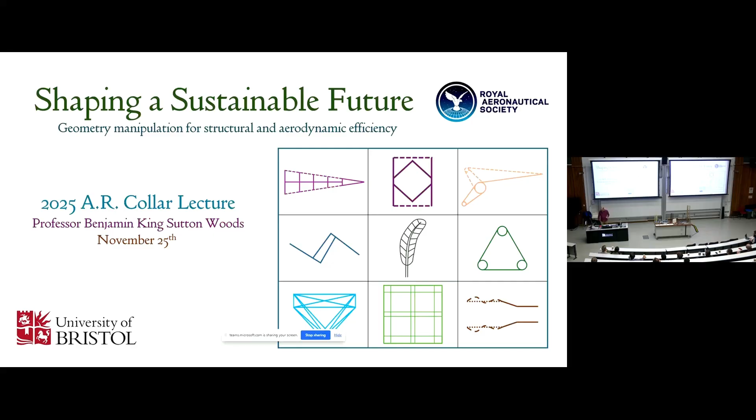So with that cheery start, I wanted to give you a little bit of a prelude, a little bit of an incredibly self-indulgent trip through my sort of history as a human being, as it were. And for me, that starts in the woods. So Woods is my last name, but it's also very much a huge part of who I was growing up.

So I grew up in a very rural part of the state of Maryland on the east coast of the USA, right next to Washington, D.C. And my mom was a single mother. She worked in Washington, D.C., so I had a lot of afternoons home from school running around in the woods in our house. And it was really sort of where I felt comfortable and happy and where I felt who I was. But there was a little bit of a transition, let's say.

So as I approached my teenage years, I got sort of distracted and drawn in to the shiny, sexy world of aerospace engineering and airplanes. Believe it or not, this incredibly suave man standing in front of you tonight was actually a slightly nerdy teenager. So I spent a lot of time obsessing over details of shiny World War II aircraft. The Mustang, of course, because I'm American, although I think today I would put a picture of the Spitfire instead.

Anyway, the point of this is that as I sort of embraced that part of who I was and what I liked, I really got into this idea of technology as this incredible, beautiful thing that can make real change in the world, and that maybe we can make new things that no one's ever done, and that was really exciting. And for me, it was exciting because it was shiny, right? Because it was something different and new.

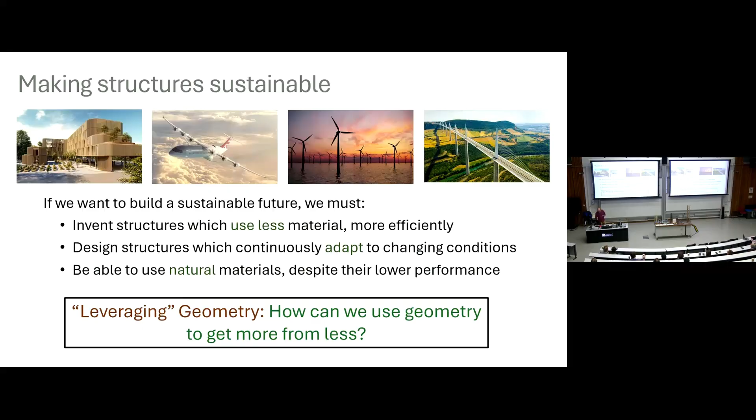Well, that sounds great, but the very simple reality is that in general, natural materials are substantially worse. They have significantly lower performance. And so the argument again is, what can we do with geometry to make up for that? How can we use geometry to offset those material deficits? So these are the overall topics or framing I want to talk through tonight.

And just to give you a little bit of heads up what's coming. This is the entire talk tonight. There's 9 different research topics, concepts, ideas, whatever you want to call them, that I'll go through. I have to apologize. There's kind of a lot here, so I will be doing more of a supersonic flying over of these topics than any sort of in-depth discussion. I'll show lots of pretty pictures, say a few things. Really, it's just to show the breadth of ideas. Everything here is published and you can look at it in more detail through papers, et cetera.

Roughly speaking, though, the overall talk splits into 2 different categories. So in the first instance, I'm going to talk through my work on morphing aircraft. So that, as I alluded to a few minutes ago, is aircraft that can change their geometry in real time to optimize their performance, reduce fuel burn, et cetera.

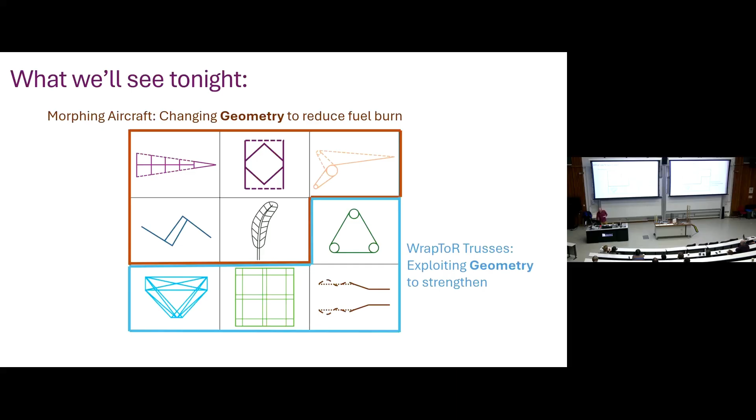The second half of the talk, roughly, we'll be talking about WrapToR trusses. WrapToR trusses are a manufacturing technology that I came up with quite some years ago to allow us to build truss structures that are structurally efficient while still being really quick and cheap to make. So that's what's coming. I do have to start, again, with a little bit of a disclosure.

So as an academic, as a professor, you may not be too surprised to learn that I don't actually do that much real work in my job. I don't actually get to do so much of the research anymore. So it's incredibly important that I lay on the table that everything that you see here, well, not everything, but a lot of it was done by other people, specifically PhD students, master's students, and research associates that I've had over the years. I've been incredibly lucky in who's come along and trusted their years of their life to me.

I just want to reiterate again that what you see here is really more my ideas maybe, and then all their hard work. So with all of that multi-stage initialization of this talk done, let's go through. Let's start talking about some technology, some actual ideas. Let's look at some pretty pictures and have some idea of hopefully what I've been working on all these years.

So I think it's quite fitting that I start by telling you about the fishbone active camber concept. So when I first came to the UK in 2012, I came to work for a professor at Swansea University, Professor Mike Friswell. He was actually also one of those Sir George White chairs here at Bristol before Jonathan. But he was incredibly kind to me. He basically gave me free rein on what I researched. And I had this sort of thing in my back pocket that I'd been thinking about during my PhD, but never got a chance to play with. And so I just went with that. And that was this concept.

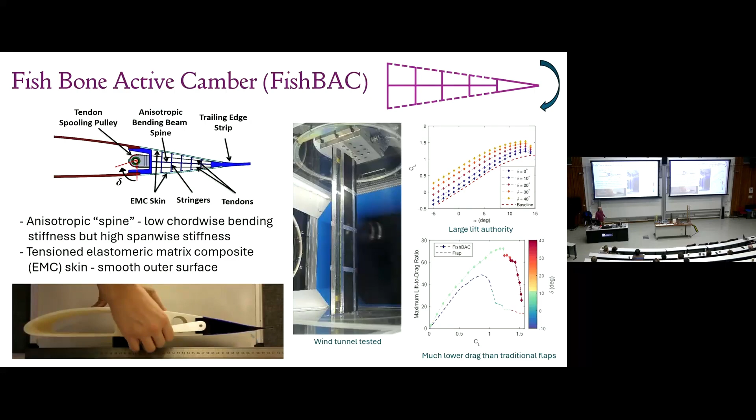So based on that really promising initial performance of the FishBAC, we've actually done quite a bit of different types of activity with it, a lot of different research. It's fundamentally quite a complex problem because we are doing this in a compliant way. We have flexibility, so we can't just assume that when the shape changes, we know what'll happen. The actual shape that's created in any particular situation is a really complex balance between the structure, the actuation, and all of the aerodynamic forces and pressures acting on it.

So we have to use somewhat sophisticated analysis methods like fluid structure interaction in order to actually be able to predict what's happening. So there's a little bit of another side of the sword when we get into this field, because it does require a reasonable level of sophistication in how we look at things. Having said that, we've developed a lot of tools and analysis methods. We've looked at the actuation side of things.

We've got a tendon-driven actuation system, which is explicitly inspired by how our own bodies work when we move our muscles and antagonistic joints around our skeleton. It's a similar concept, so there's a lot to do with developing that tendon system, looking at the actuation side of it. We've done a lot of work on the aerodynamics as well, of course, from low fidelity to medium fidelity to high fidelity methods.

Another fun little thing along the way is this other related concept called MELD, which is a morphing elastically lofted transition. It's sort of a three-dimensional version of a FishBAC that allows you to have a variation in that camber along the span. There's some really fun geometry inside of that. I don't really have time to dig into it, but that's worth a Google on ResearchGate if you're interested.

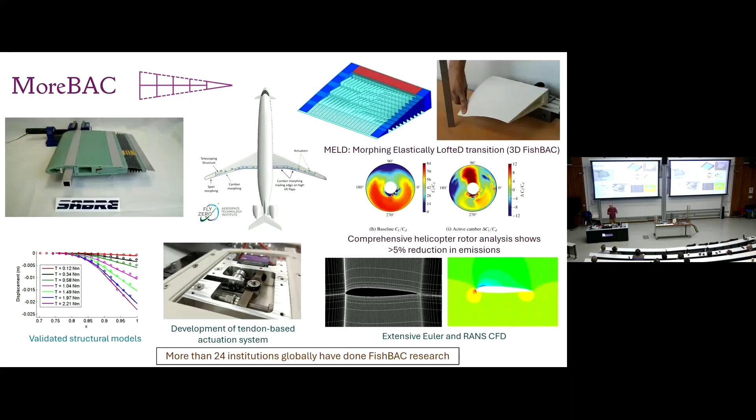Now, I will say, genuinely, as nothing more than a brag, that I recently had to put together a case for promotion to professor, which happily went through. But as part of that, I had to sell what I've done. And so I started Googling around, and it turns out that this concept has been looked at by 24 other institutions all over the world. And even happier still, the first person to show up tonight came from Southampton, and he said he came because he is working on the FishBAC at Southampton as well. So that means 25 institutions, so keep them coming. Anyway, let's keep moving.

Another related concept. So FishBAC is about changing camber. That's a really effective way to control the amount of lift that an airfoil generates. But there's a lot of other ways that we might want to change the shape of the wing that aren't quite so simple. One of the fundamental issues is that if we ever want to change the area of a wing, then we're going to need a material that can smoothly and flexibly change its shape. Now, this is really the ultimate core issue that's plagued all of morphing aircraft research from the very beginning. And I'm not claiming that I've solved it, but here at Bristol we've developed an alternative geometry that allows us to tackle this problem with morphing skins in a slightly different way.

And I think the key thing to get across here is, if you imagine the top of a wing, and let's say for the sake of argument that you wanted that wing to get longer and shorter in order to change its span and its flight performance, you would need a structure that, under those very high levels of aerodynamic load you would have flying at, whatever, Mach 0.8, can get longer and shorter without bending out of plane. You need to really control that out of plane displacement. You need high stiffness out of plane, but low stiffness in plane. And that's an anisotropy problem. You need a material or a structure that has very different stiffnesses in different directions. And that's what this is.

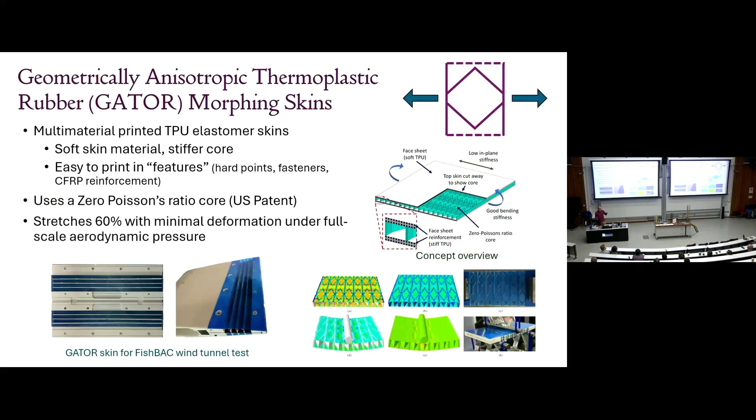So this concept is working out pretty well. I've had a PhD student finish up on it. We've done some nice demonstrators. So there's an example here of a wind tunnel model of the FishBAC that uses this concept. And we're now looking at it on a bigger scale. But basically, the trick here, again, is to use geometry plus these flexible materials to give us a better balance of what we're trying to achieve.

Now, this is our current work with the Gator skin. So there's a large ongoing project here at Bristol called DAWS2. I've got a tiny little bit of it where we're looking at using those Gator panels, that flexible skin panel, to solve a problem that's come out of a really interesting and really prescient concept that Airbus is now looking at. And that concept is called the semi-aeroelastic hinge. So some of you may know that already.

It's been a very active bit of research, both here at Bristol, where before my time it actually originated, and it's since gone to Airbus and it's being looked at very seriously there, including plans to actually flight test it in the next year or so. But the semi-aeroelastic hinge has a little bit of a problem because the basic concept is that you take the very tip of the wing and you allow it to rotate. You allow it to bend out of the way of any oncoming gusts that would otherwise potentially break that wing.

So there's some really clever geometry tricks going on with that concept itself already. But one issue that's created by it is that there's a gap. There's a hinge mechanism that you're putting outboard, and you can see here in this flying small scale model, and in the larger renderings, that this hinge needs to be covered up so it doesn't add too much drag, but unfortunately, it's actually angled to the airflow. There's a geometry trick going on with the basic concept that requires that hinge line to be angled.

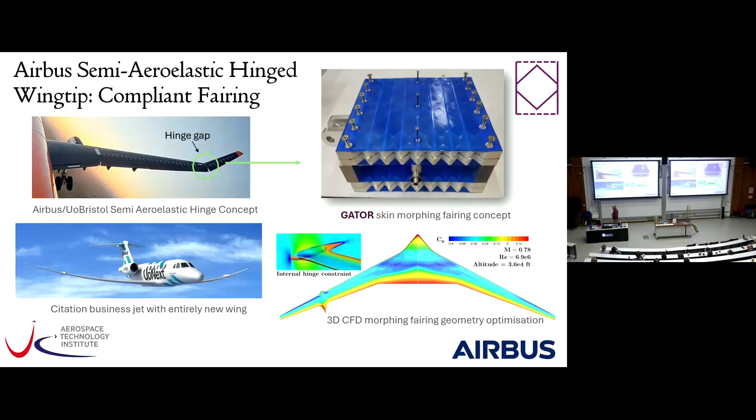The result of which is that any normal mechanical fairing that you might put over it ends up actually quite draggy because it's misaligned with the flow. So the basic idea of our work on that project is to use these compliance-based mechanisms, this gator concept, to cover that hinge with a structure that can smoothly deform while taking that load. And you can see some initial prototypes here, and there's 2 RAs working on that now, with another related piece of work looking at the aerodynamic optimization of the shape of the fairing in order to minimize its drag. So we've got some really fun CFD optimization work going on with that.

So staying on the semi-aeroelastic hinge, but moving in a slightly different direction. A concept that I've been playing with for a few years. I don't have a good name for it yet, apologies, so we'll just call it a 2-stage torsional stiffness for now.

I'll come up with an acronym at some point, because you don't just have the acronym, of course, you have to make up a name that gives you a good acronym. It's a very delicate science. It's a black art. I spent a lot of time thinking about it and worrying about it.

But anyway, back to that semi-aeroelastic hinge concept. One of the other realities of how that concept works is that in normal everyday operation, when you're just cruising around, you would love for that wingtip to be level. You would almost love for that device to not even be there. You just want it to look like a normal airplane wing. Up until the point where a gust hits it, and you need that device to move out of the way to reduce the load generated to make sure you don't have any issues with failure of the wing.

Now, the current approach to doing that is rather active and mechanical. So, they're looking at various devices that can keep that wing locked in place, and then they detect a gust and they release it as an active process. The concept that I'm looking at is a way to replace that active device with something that's purely passive.

So literally springs and levers and maybe a bit of cable. Where the fundamental idea, in the simplest possible way, is that if you could make a spring, a torsional spring, that's really stiff in its initial working range, then that would be really good at keeping that wing as level as possible in normal flight.

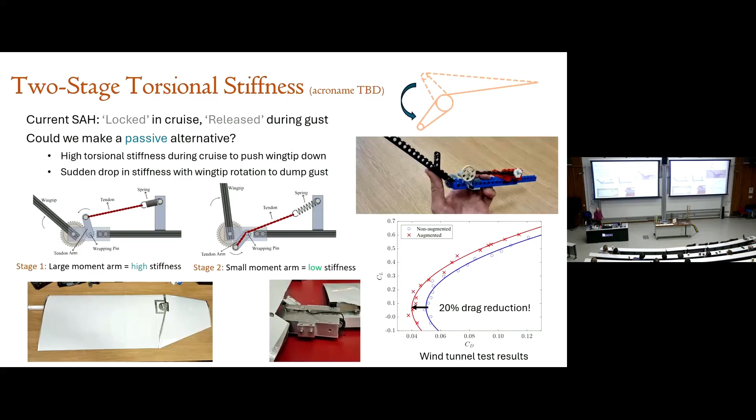Okay, so now we transition to where I'm at with my fellowship right now. So for the last 5 years, I've been on an EPSRC Early Career Fellowship called AdAPTS. That's another over-engineered acronym for Adaptive Aerostructures for Power and Transportation Sustainability. I even made a logo for this that no one's ever looked at.

But without belaboring the point, back to my earlier story, there's a little bit of, not quite a crisis in confidence, but starting to question things. So the work I've been doing for a very long time on morphing adaptive structures, unfortunately, is still actually really far away from reality, right? For lots of reasons, one of which is just the incredible and well-deserved conservatism of commercial aircraft.

You can't just throw stuff up there, especially if you're talking about wacky stuff that's flexible, that has elastomer-based skins, et cetera. And so unfortunately for me, it feels like real impact is quite far away still. And as a result, I've tried to find a version of this problem that I think maybe has more potential impact, that has more fundamental depth to it, or maybe just that is interesting and different, I don't know.

And the version of that I found is something that I call biologically inspired robotic birds, so BIRB. And the idea here is, okay, the simple version of the idea is let's just make some drones that look cool and look like birds. The overly philosophized version is how do we figure out how to get better at designing complex systems that have a lot of different things going on at the same time, right, like a bird, where they have control and sensing and actuation, aerodynamics, and structures and propulsion that happen in an unbelievably cohesive way, right? It's sort of everything going on all at once in a way that is just so fundamentally different from how we build our airplanes today.

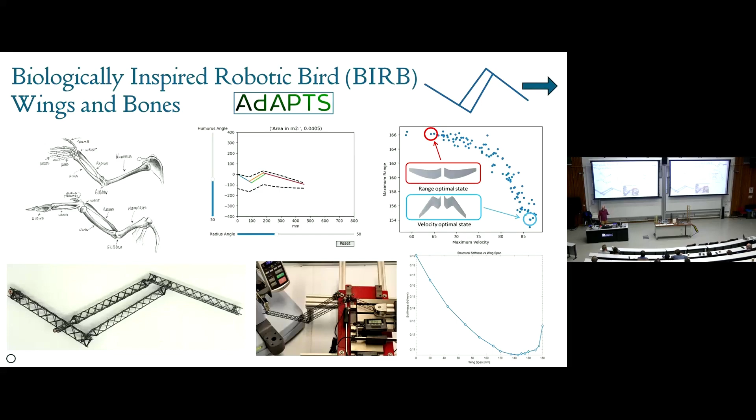We're now starting to look at, with the same researcher, what happens with torsional stiffness in the same way. When we try to twist the wing, how does that change with span? I expect we'll get a similar, interesting, complex result. And so that is just an initial thumbnail sketch of what, to me, can grow out to be really quite a nice, interesting, complex consideration of the sort of kinematic coupling that's happening all the time in bird wings. And I think there's something quite interesting there to dig into.

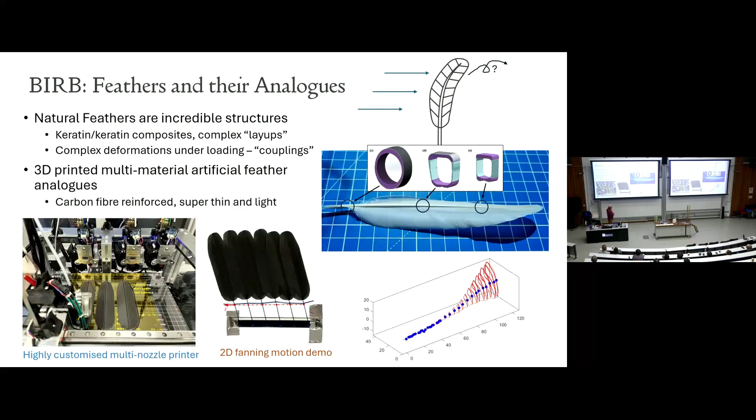And again, this is all very early work, but watch this space, I guess, is mostly what I can say. Okay, now I'll speed up a little bit because I do have a tendency to keep yapping on.

And we'll switch gears. So now we're going to talk about the wrapped tow reinforced truss technology, WrapToR Truss. I invented this in 2009, believe it or not. Never felt more old. I was on a project at the University of Maryland to build a human-powered helicopter. It was a complete waste of time. We spent like 5 years, hundreds of thousands of dollars, like 50 people working on it. And we made a human-powered helicopter completely useless.

It was the size of a US basketball stadium. It could sort of fly up and then come back down. Completely useless as a piece of technology, but an incredibly difficult engineering problem that ended up being a really nice sort of motivation or just opportunity really to develop a new piece of technology.

So at the very start of my involvement on the project, I was given the job of blade design, so I was in charge of the aerodynamic and structural design of the blades. I spent a lot of time looking around at structures and materials to make the spar, kept running into sort of excessive weight and issues with that, so I came up with a truss as an incredibly efficient geometry solution, again, back to geometry, made from composite materials, which of course are the best materials that we know how to make at this point in time.

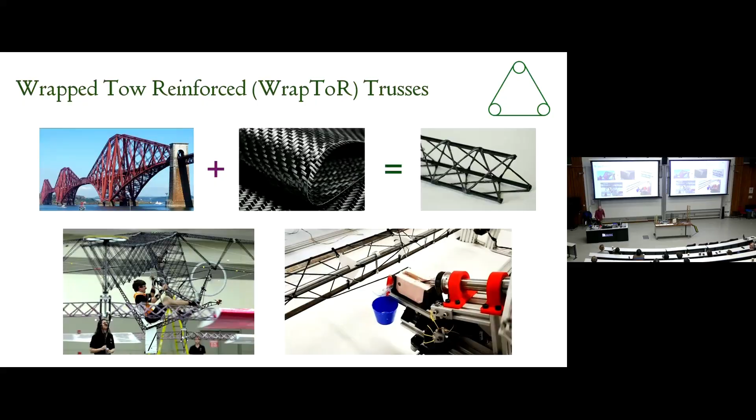But basically, the point is that you end up with, I would argue, especially in all the proposals I write, the best of everything. So you have the best geometry that we've come up with as engineers for efficiency. You have the best materials, and we're doing it in a way that's sort of low cost and scalable. Now, that's the basic idea. There's been quite a few students and quite a bit of research over the years, so I'll just briefly overview.

We've done this in a lot of different materials, so carbon fiber to start, but we've also looked at fiberglass. I did some work with Vestas, where their products are fiberglass. It's a lot cheaper, so they were curious what we could do there. We've done all sorts of different sizes and shapes, tapered, square, triangle. We even got sort of hexagonal trusses we made.

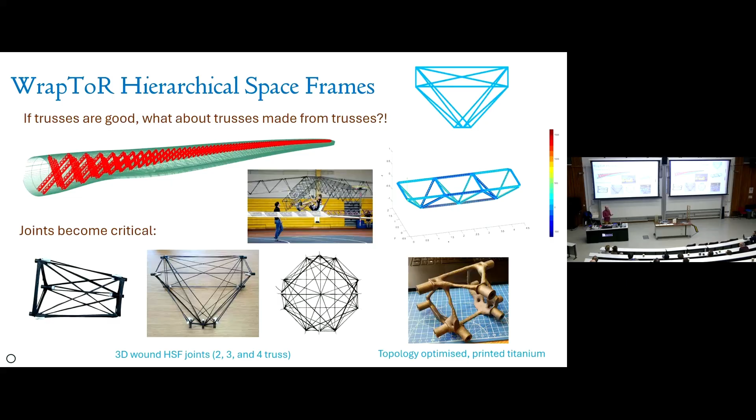And I won't say too much more about that, except that it ended up being this whole thing that poor Kyle had to spend a couple years coming to grips with. But he did an absolutely fantastic job on it. He's come up with a really nice piece of code that automates that process of simulating the winding.

Okay, so another what-about question. So, again, trusses as beams are already a decent place to start. There's lots of beams. Trusses of trusses as frames for general structures. Okay, now it's starting to feel more real. But of course, a lot of things in the real world aren't giant, open, porous structures, right? There's a lot of things that need to have skin. They need to have continuous outer surfaces. So, very obvious examples of airplanes and rockets.

These structures are made with skins that today are very often things like sandwich panels, where you take advantage of some of the stuff I was talking about earlier with the gator panels. But we had the idea of replacing our traditional way of doing this, stringers, sandwich, etc., with just WrapToR trusses, right? We start with the assumption that WrapToR trusses are always a good idea. So I had a PhD student on this who's looked at reinforcing standard composite carbon fiber layup skins with these trusses.

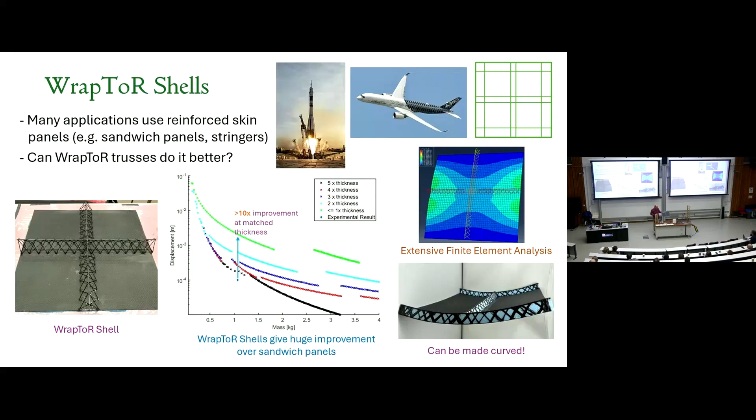Another sort of passing note, we can do this curved as well. So I had a nice third-year project student very recently who made a curved version of a WrapToR shell. There's a lot of curves on airplanes, so that feels important.

And then, as my final topic, you'll be happy to hear after me rambling on for some time now, is on that final step that I alluded to in the very beginning about how can we get back to a more natural approach? How can we use the geometry of WrapToR trusses in this case to compensate for nature and what it can provide us in terms of materials?

And so for this, we just want to make natural versions of WrapToR trusses. So there's a PhD student working on this now, Matt, and he's making WrapToR trusses with bamboo, where we actually use bamboo in its native form as a culm. It's called the stalk of the bamboo. We keep that. That geometry is also really, really good. It's up there with the feather in terms of sophistication. Again, I could spend an hour telling you about how unbelievably evolutionarily optimized bamboo is. Let's just take that for a given for the moment.

We're also using a natural fiber for the windings. So in this case, we have flax fibers. And the epoxy is a hard part. Epoxy is a petroleum product. This particular one is partially bio-based. So I think about 30% of its content actually comes from tree sap. That's been modified to have exactly the same chemistry as epoxy. And so it has a very similar performance.

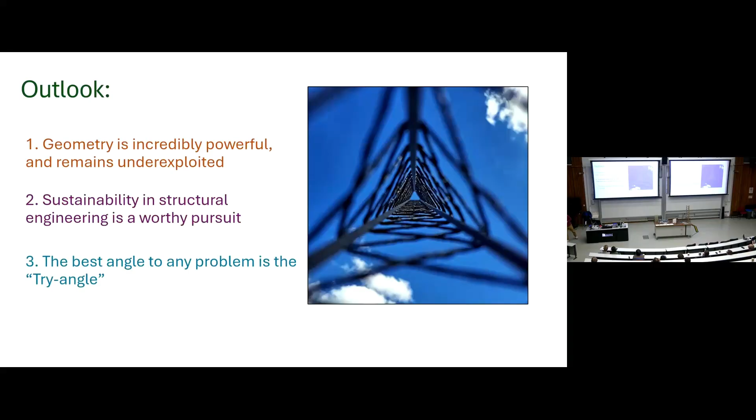I hope as well to have gotten the point across that sustainability in structural engineering is something worth spending our time on. And then just to bring it back to that 5th grade geometry teacher with another one of his gems, and to close us out again on Arthur Collar with his beautiful aeroelastic triangle: the best angle to any problem is the triangle. Okay, and that's all I've been trying to do in these last many years of my career.

Just because that was too light and cheery of a note to end on, and this is actually a little treat for Mark, because we both love Tom Waits, who's a very oddball but incredible musician, he's got a song where he says that the earth died screaming while I lay dreaming. And I have to say, having been in academia for quite some time, that's a lot of what we do as academics, we kind of have our little dream worlds. And I'm slagging myself off at the same time, so I'm allowed to do it, but I don't know, maybe we can shift our focus a little bit and try to do less work.